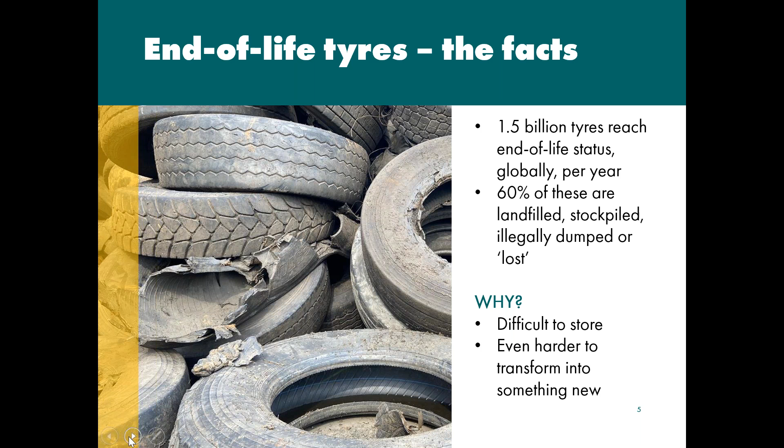So why not produce TDF? The recycling and reuse of scrap tyres is an integral part of reducing the environmental footprint, and using methods like Tyre Derived Fuel are one way to help deliver sustainable solutions to protect the world for future generations. Many used tyres today are dumped into landfills or left in stockpiles. In 2017, 39.5 million tyres were disposed of in landfills, where they will take hundreds of years to decompose.

Benefits of producing TDF include saving millions of tyres from landfills in a safe and environmentally responsible way, keeps unsafe, reused tyres off the road and out of the market, produces the same or more energy as other fuels due to its high heat value, leaves no leftover residue to be landfilled, can reduce emissions from CO2, sulphur and nitrogen, and is a proven and widely recognised technology regulated by many countries. TDF, in short, has the flexibility to be used in a variety of industries. These include cement manufacturing, pulp and paper industry, electric utilities, industrial boilers, and tyre to energy facilities.

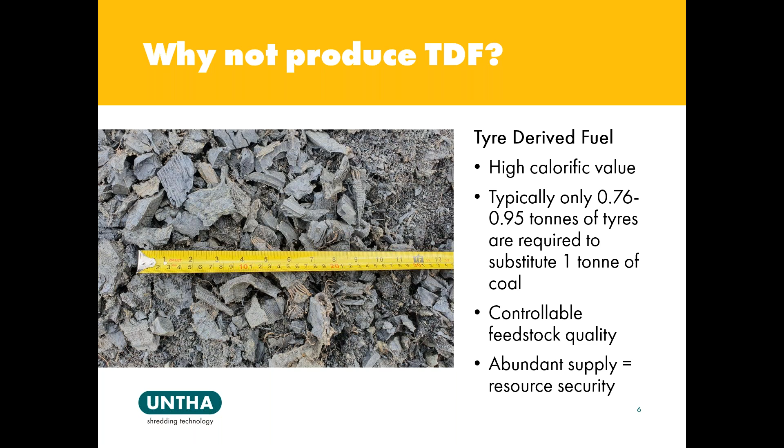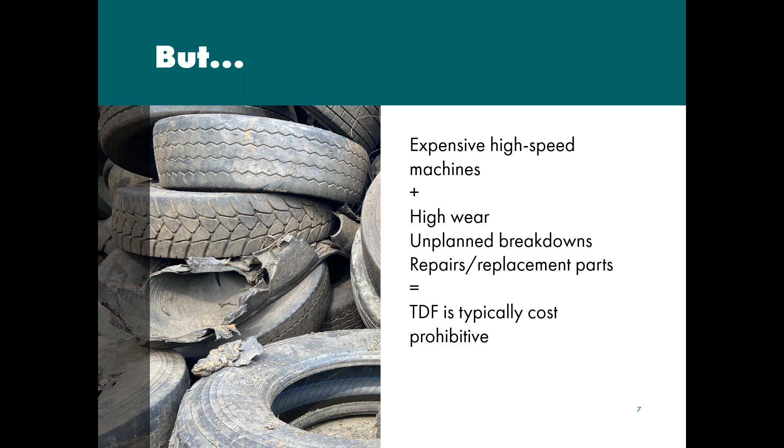But historically, expensive high-speed machines and complicated recirculatory systems have been used to produce TDF. This culminates in high wear requiring repairs and replacement parts. Invariably, unplanned breakdowns occur, and this all adds up to TDF being typically cost prohibitive to produce. That is until now.

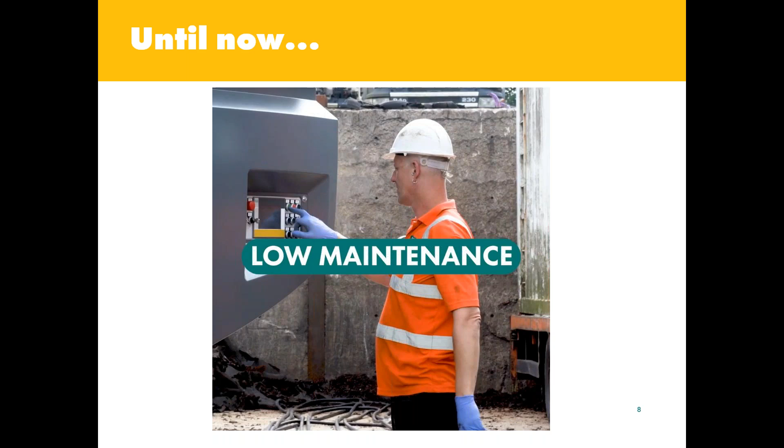So moving on to the UNTHA TDF system, pretty much what's in the box. So looking at the slide now, you can see we have this particular system here as an in-feed conveyor. The primary shredder is our XR3000C HT, which is the iTorque machine. And we have an in-floor conveyor here. It enables the operator to feed by either front-end loader, forklift, or even manually if required.

But take away the conveyor, we can equally be at home with feeding with grab or front-end loader directly into the shredder. And you can see there, coming out of that primary shredder, we have an initial discharge conveyor running then into our secondary shredder. And the secondary shredder is the XR3000XC machine.

Both of these machines use the UNTHA EcoDrive system. So these are a synchronous drive package, 2 times 132 kilowatt. And once we run out of the 2 shredders there, we then run into a zigzag system for defibration, and then onwards into bagging up silos, and then further on downstream for pyrolysis.

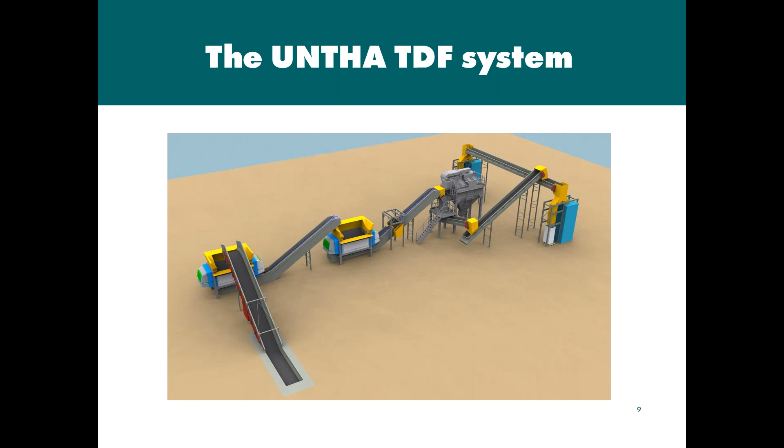Now, looking at the system, we've broken the system up in 2 distinct ways. So on the primary shredder that you can see here on the XR3000C HT, what we're doing with this machine is we're producing the high quality clean cut 50mm 2-inch chip. And obviously, on that particular discharge conveyor, we have no metal extraction because we're taking the ferrous out further downstream if we were to produce a smaller product size.

In this particular instance, we've got some crosshairs there that you can see that is splitting the system up. So for a single pass, 50mm 2-inch TDF chip, we would only use the front end of the system. So again, it's a single pass standalone system. We would move the crossbelt magnet system from the secondary conveyor onto the primary conveyor system, and that's where we will be pulling off probably around about 92% of the free wire.

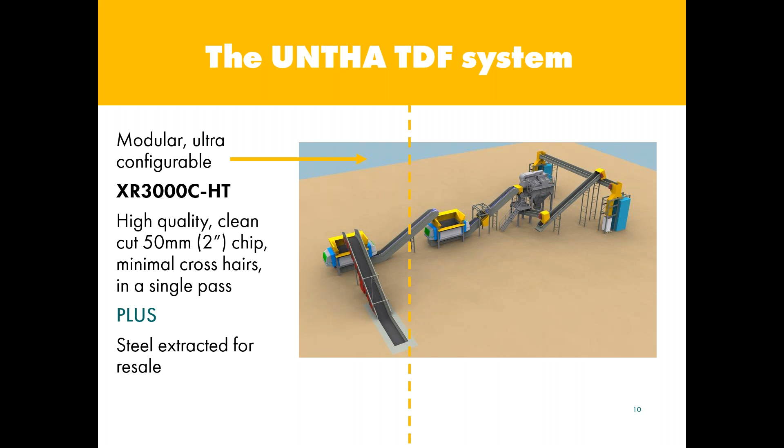We can then add a permanent head magnet onto that secondary conveyor to remove the very fine material. So extremely good quality FE material is being taken out of the product, and a really, really good quality single pass TDF is being achieved.

But when we move that forward onto customers that not only want to produce a TDF and fulfill some of their markets, what we then move on to is the supply of the XR3000XC machine, which has a slightly different rotor configuration. And this is the machine that is now going to take that 50mm chip down to a sub 20 mil. And typically the product that we're producing when we run this on a 20 mil screen will be in the size band between 8 to 15 mil.

So what then we're doing is we're producing a sub 15 mil TDF chip that we can then use for pyrolysis. And again, on that secondary system, a lot of the cement companies that are using this material for their alternative fuel, they do like a little bit of steel left in the products. So we never aim to remove 100% of the steel.

And what we see there with the zigzag at the end of the system, we are then removing the fibre from the system, and then the fibre on its own can be used as a blend in SRF, again as an alternative fuel.

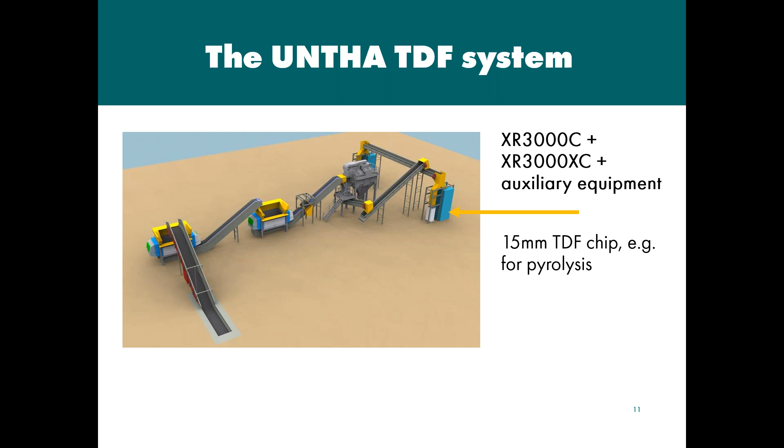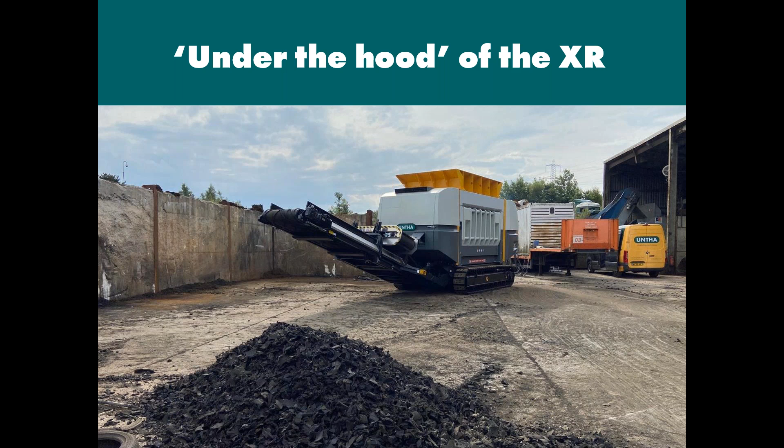So what's under the hood of the XR? As you can see, the slide there shows the mobile system, and running on to the next slide, we start to get under the hood of the machine on some of the top level specs. So on this range of machines, we have new iTorque innovation. Now this consists of the I-26 low speed iTorque gear reducers, which are giving us that extra bang for your buck when we need that machine to cut through that difficult product.

The machine has been purposefully engineered for this tyre application. So the rotor is equipped with wear welding for extended life, and this is actually robot applied at the factory. So very, very tight tolerances. We have variable product sizing, and to achieve that, the machine is installed with a hydraulic quick change screen system. We can typically change screens in anywhere from 30 to 50 minutes, depending on whether they're screen bars or actually screens. And there are variable size screens available for various product sizing.

So even if we use that XR3000C HT as a single pass machine for a 50 mil TDF, we could still produce a smaller TDF. We could still go down in a single pass to a 25 mil, 1-inch TDF in that machine as well.

So we have electric drive. Now this circumnavigates the costly fuel duty and the fire risk. These are direct electric synchronous eco drive units. Typically, as I said before, 2 times 132 kilowatt drives. We don't employ any belts to drive this, so we have no belt slippage. This is direct drive straight through a safety clutch system.

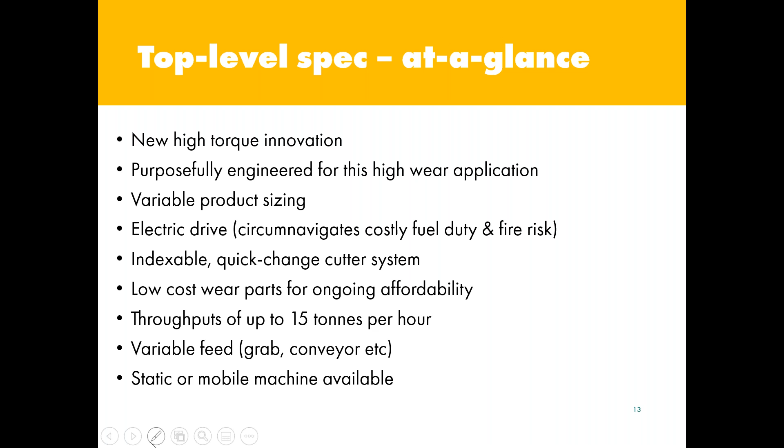So why do we have the global interest? Well, we know that TDF is one of the cement industry's most trusted fuels, but where do UNTHA slot into what's going on with the tyre industry at the moment? Well, the XR3000 CHT is a revolutionary machine concept in tyre shredding. In actual fact, the pioneer when it comes to single pass shredding.

Just like all our XR products, the XR Mobile is also equipped with the energy efficient UNTHA EcoDrive. This ensures that your operating costs will be minimised and that material quality will be maximised. With an extensive range of interchangeable screens and cutters, the shredder can be configured according to the customer's output specification. So, for example, a consistent 25mm 1-inch TDF particle or a rough shred 100mm 4-inch particle size are both achievable, as is anything in between those sizes.

This means the XR series can be configured with ease to produce a homogeneous alternative fuel for the waste-to-energy, cement, gasification, or pyrolysis markets. In addition, a height adjustable discharge conveyor belt and optionally available magnetic separation system will give you everything you need for an efficiently operating shredding system.

So some benefits at a glance. We have a robust shredder with a high degree of resistance to unshreddable items. We have an effective removal system for unshreddable items. We're producing a homogeneous defined fraction size through a perforated integral screen. We have a slow speed high torque shredder. We have low noise and dust emission, and typically those noise levels are sub 75 dBA in operation. It's unusual, but you can actually hold a conversation with somebody standing next to the machine.

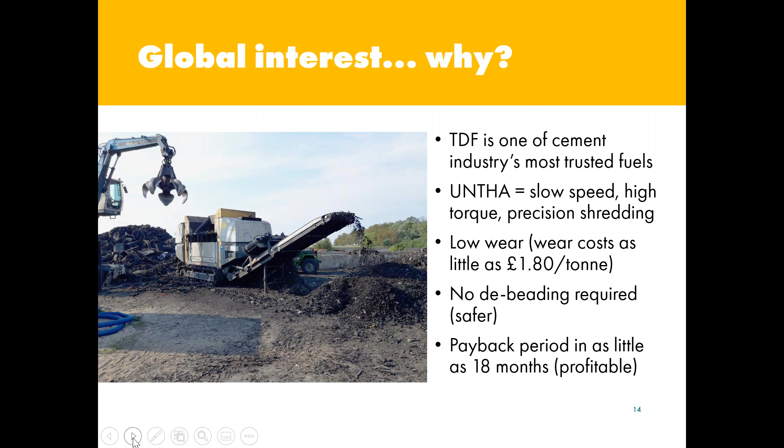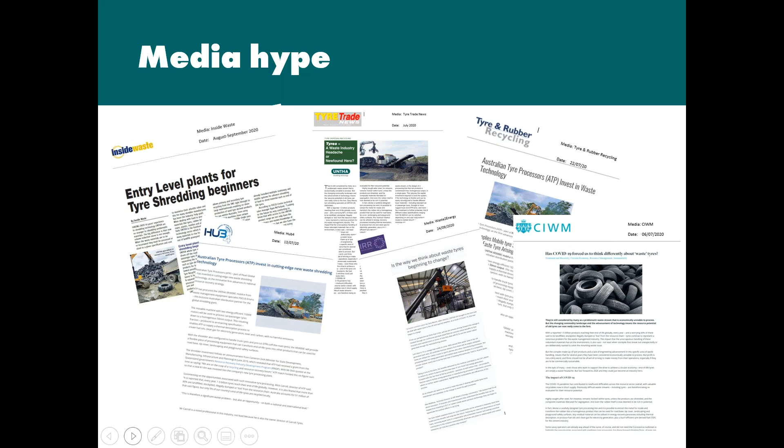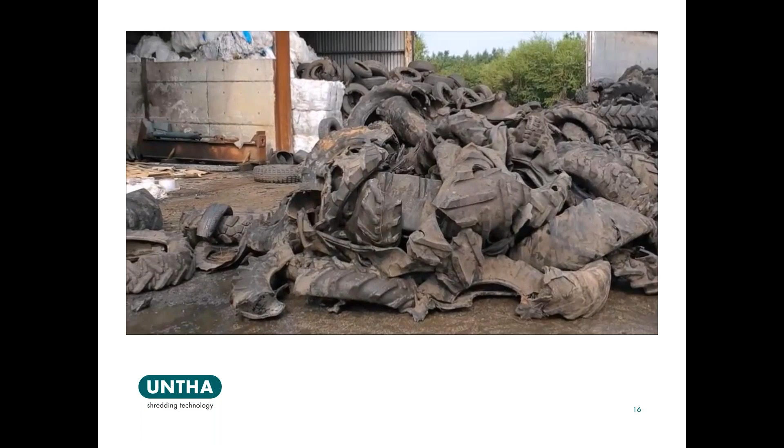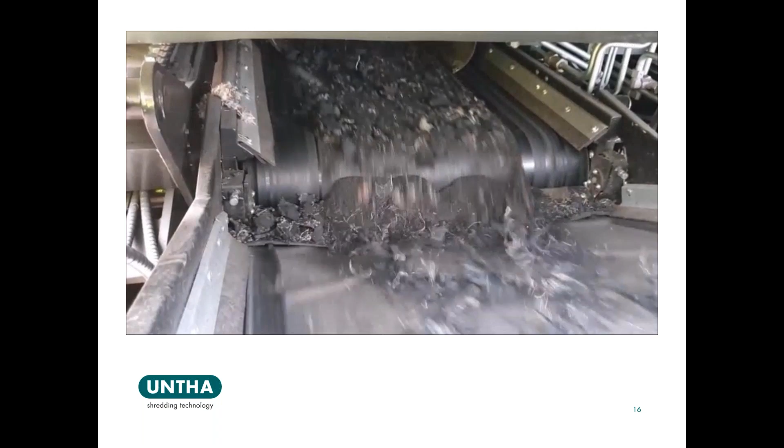And this, we ran a trial a little while ago, probably about 3-4 weeks ago now. And we have one particular customer that is very heavy on agricultural tyres. Of course, it does have the mix there of passenger and car tyres as well as truck tyres, including super single. And you can see here we have the material coming directly off the horizontal conveyor onto the incline conveyor. And again, you can see the TDF being produced there, and just to the right-hand side, the free clean wire also coming off the machine.

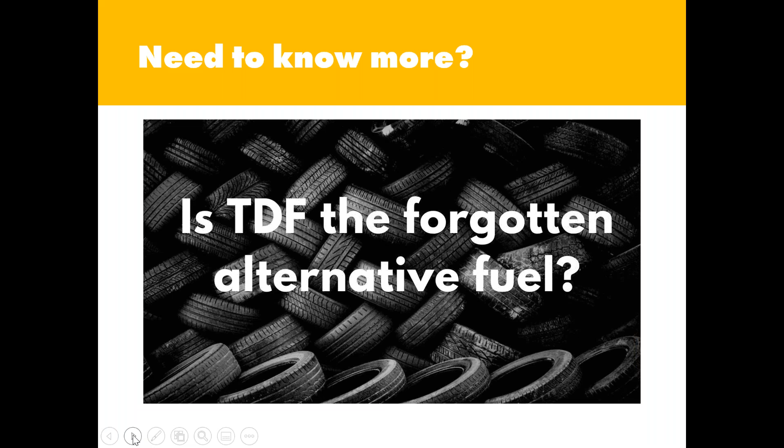There's a very straightforward question here, which says, are the days of contra shears gone? Yeah, I come from a background and history of contra-rotating shear shredders. As I said earlier, I've got vast experience with that particular technology. And don't get me wrong, fantastic machine, and it still is a good machine. But innovation is now starting to dictate how we move forward.

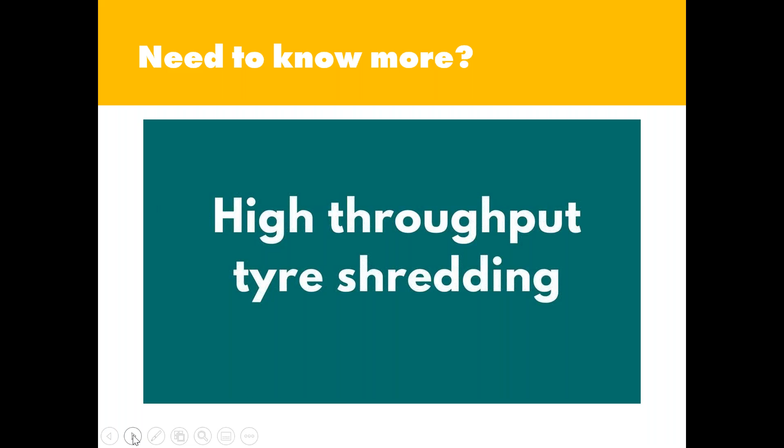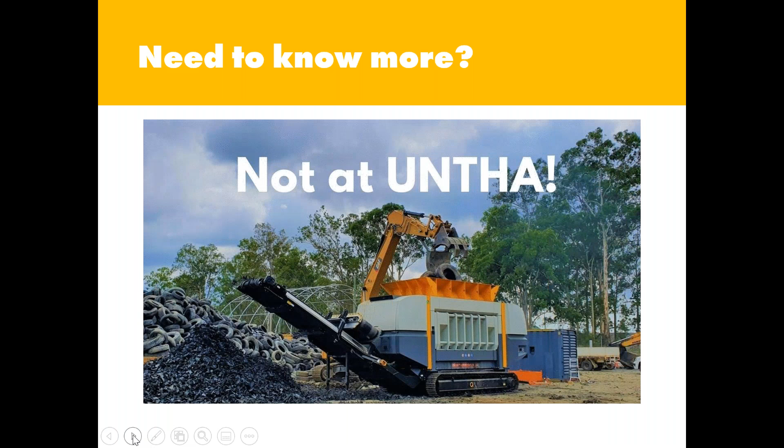And what the innovation is bringing with it is a change in tyre shredding equipment, in so much that we're really driving down the cost of a cutter, because typically with a contra-rotating shear shredder, the cutter cost can be quite colossal. And most contra-rotating shear shredders need to be stripped down to replace the cutter set. So then we have a lot of time and a lot of labour to carry out that task, but also it means the customer's out of productivity for a period of time.

Now, if I call that back to our particular technology, the single shaft technology in the XR3000 CHT, we literally open an access door up, and in the cutter stack there are only 42 cutters on this machine, and we have a single bolt holding a cutter. That cutter is indexable, so we can spin the cutter around 4 times. And then when that's worn out, we unbolt the cutter, take it off, replace it. Whereas a cutter change could take anywhere from 2 to 3 days, depending on size of machine, for a contra-rotating shear shredder, we can do that cutter change typically in 4 hours.

So it's the ease of maintenance and the low cost of wear parts that is making it very viable for tyre processing companies, because tyres are a very, very high wear, very tough application. We're now looking at taking the tyre chip down smaller and removing more and more of the material that we can recycle. So it goes without saying that 2 of the big areas where we can save tyre processors here are the wear cost and the maintenance cost, and the ongoing costs for the upkeep of the equipment.